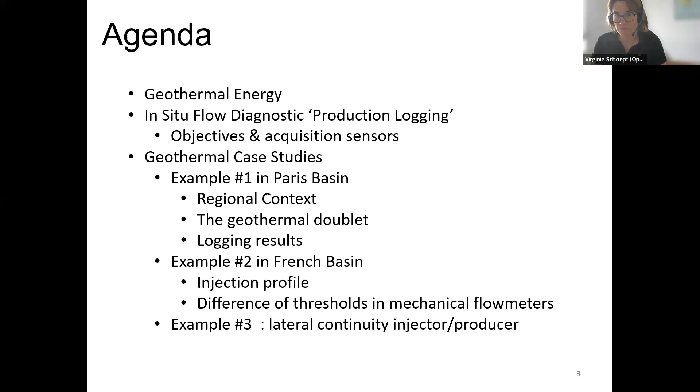So today we're going to start first putting in context this production logging, and I'd like also to present the instrument we are using before we deep dive into the case study. There are 3 different places and they are all in France. So let's put this case study in context. They are based on geothermal wells that are deep wells.

So there are different types of geothermal energy. There is the shallow one that is limited to 200 or 500 meters, depending on the local legislation. That's an illustration from EGEC, by the way, the European Geothermal Energy Council. And then below 500 meters, we go into deep geothermal. And I would say there are 2 types. One that goes to moderate depths, 5-6 kilometers, up to 200 degrees C.

That's a geothermal that is mostly used for heating and cooling, and we have examples from this type of geothermy. But there is also very deep geothermal. I think you had already different talks in this special interest group that go deeper.

So today, the tools we are going to use are tools that are used in hydrocarbon wells also, with the common spec of 150 degrees C max and 1034 bars. But of course, if we go to geothermal that is dedicated to producing electricity, when we go above 200 degrees C, we need to use other types of tools. They do exist, based on flask pressure housing. However, they don't necessarily last very long.

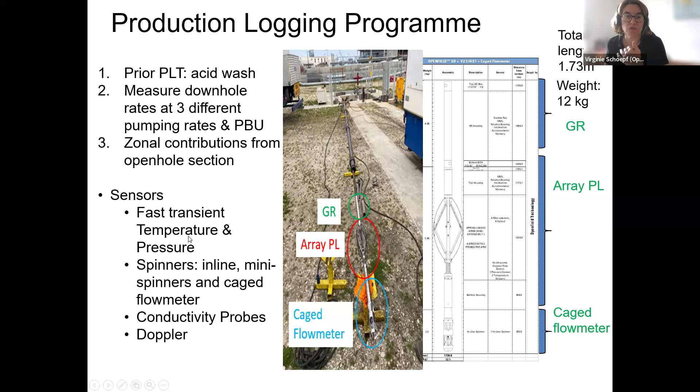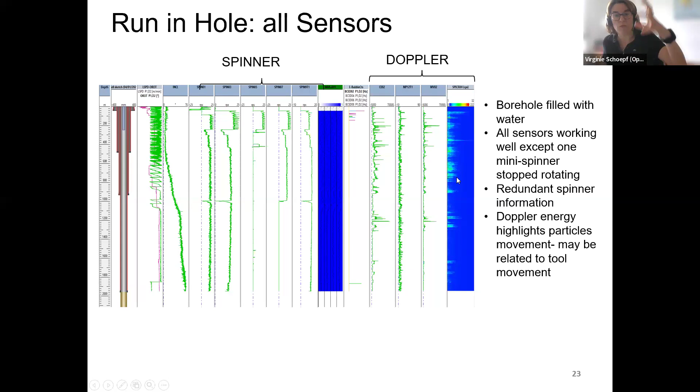Also looking at the run in hole, the conductivity data. So I mentioned that we have a conductivity probe. This probe is not calibrated to salinity compared to some of the ones, I think, that exist in the industry. For us, at OpenField, we were using this probe to really recognize water versus hydrocarbon. But in the low salinity range, we know that this probe is going to be

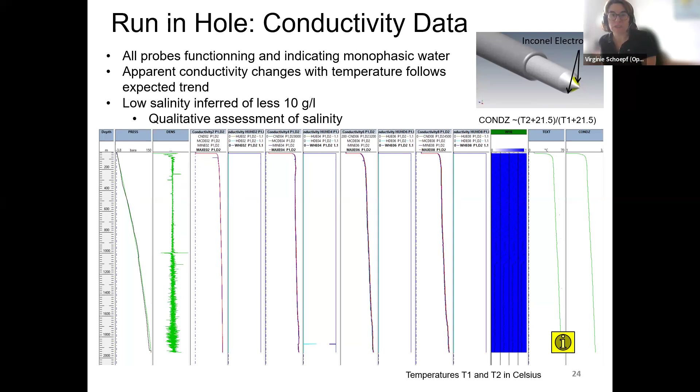What we know also from our sensor, the fact that we can still see an increase, that it is not saturated, we know that the salinity is less than 10 grams per liter. So of course, at surface, the water is produced and analyzed, and that was confirmed.

I mentioned that prior to going up and down, there are generally 3 steps of rates that are done. So that was acquired. So we acquire pressure, temperature, all the spinner data. And we compare with a surface metering that was given to us with quite a large inaccuracy, 25%. And based on the data we got from the production logging tool sensors, mostly propellers, this is inside casing, we are able to get more accurate than the surface metering. So it's more in a plus or minus 5%. So we are in good agreement with surface.

Another thing that they do at this stage, they shut in the well and they record the pressure buildup. Why do we do that? It's in order to understand the reservoir transmissivity, and that's quite key to characterize the subsurface environment.

Now, going into the reservoir in open hole, 8.5 inch, it was done in 2 different modes. First, it was done while producing. It's an artesian well. The Dogger is artesian, so it's producing naturally. And we collected some data during the production PLT, just by producing. Here you have again the well architecture and the open hole part, gamma ray, Doppler, water holdup, only water, no bubbles, and then the spinner data.

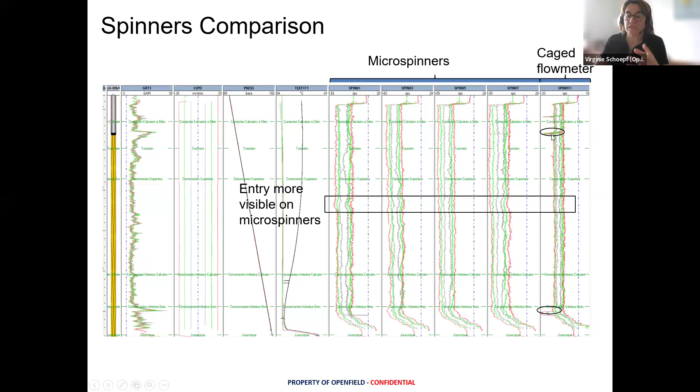That's quite important to have a sensitive flow meter, because it will be able to allocate that, to say that yes, there is some that is going into the limestone. We know that the biggest helix tends to average more; they are more inert than the small helix.

Now, if we look at the interpretation, zooming into the reservoir, as I say, we have limestone and sandstone. That's the lithology with the gamma ray. And then QZT is a flow profile while injecting. And as I was saying, most of the volumes, QZI is a zonal index, are going into the sandstone. But some of it, thanks to the small propellers, could be allocated into the limestone.

So when we look at that, we see, wow, it's quite, I don't know, 300, 400 meters, and maybe 50 meters of sandstone, and that's a vertical well, and we are drilling a lot, with most of the flow going to the sandstone. So that can maybe trigger some question: should we in the future do a deviated well with a longer stretch into the sandstone?

Well, yes and no. Again, the limestone, this is a profile just at the start. It may be better, may have more fluid going into the limestone, but there is also the fact that this well managed to get quite the objective in terms of rate.

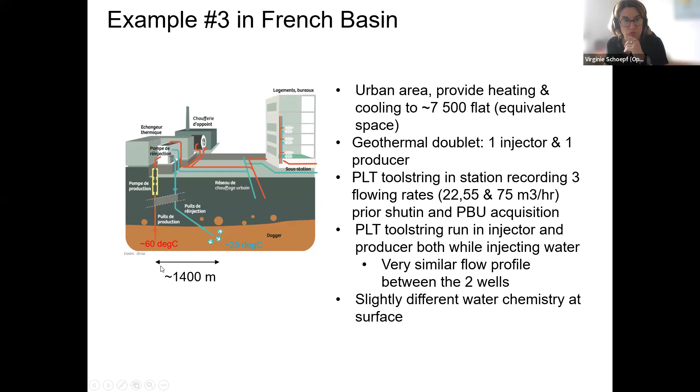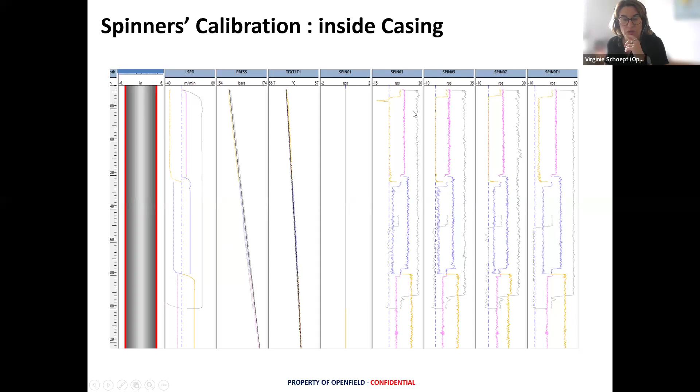And again, the temperature is quite low, close to 60 degrees. The distance between the two wells is over 1 kilometer. First, again, just to show you a bit of spinner calibration. I didn't mention that, but how do we do spinner calibration? We acquire data at different cable speeds. LSPD is cable speed. So you move the tool at different speeds, and then you record the rotation per second of the different spinners.

One way is to do a cross plot where you have the RPS, rotation per second, and cable speed, and then you will get a slope if you are in stable condition, and that slope is going to be the conversion of RPS into flow speed. So we can do that for all the spinners. The mini spinners tend to have the same standard slope. And then the inline spinner, remember there is a bigger helix, gives us also a speed.

So what's interesting here, if we look at the type of flow, the flow rate was 75 cubic meters per hour, and inside the casing it's 8.6 inch. What we could see, we had very accurate velocities, good calibration plots, and several micro spinners which repeat a velocity around 30 meters per minute, whereas the biggest helix at the center is reading higher.

So why is that? Well, if you use the flow rate and the ID of the pipe, you can see that you are actually in laminar flow. And in laminar flow, depending on where you are in the cross section, you will get different velocities. So the helix, the inline spinner, is at the center, reading higher velocities than the mini spinners that are just less than 1 inch from the wall.

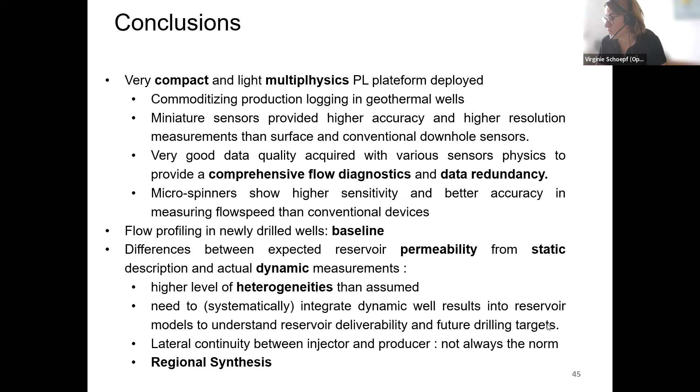And looking at the chat box, we have a couple of questions that I'm going to address. So Ivan Virshlo says, is it true that the Rhine Graben geothermal gradient is 100 degrees per kilometer? Basically 200 degrees at 2 kilometers depth. Do you have any insight on that? Yeah, it's 10 degrees per... I'm mixing up the units. It's 10 degrees per 100 meters. Yeah, it's 100 degrees per kilometer. Is that what the question was?

Okay. But there are some areas with even slightly higher gradients. Maybe there are people from Germany or from Alsace in the call, ES or Lithium de France, that know it's 100 degrees per kilometer, but even slightly higher sometimes. Yeah, we do see those, not just in Europe. Earlier we were talking about the projects in the United States, there are some areas where it's easy to find 100 degrees per kilometer.

Tuscany, Hawaii, there are lots: California, Oregon, Yellowstone, Indonesia. That's maybe something to think of for the future. We're going to have to design, as we talked about, tools that can handle super hot environments. That's something for the future.

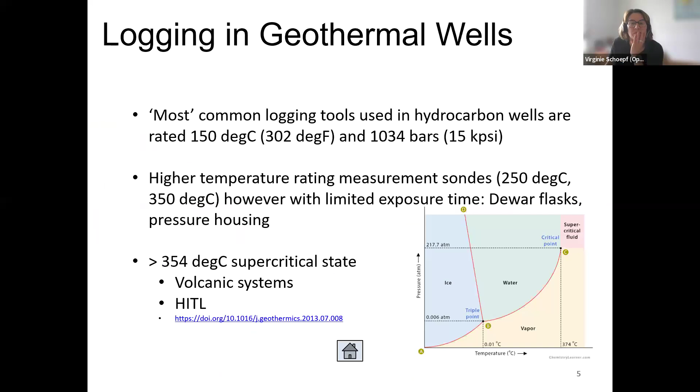Thank you for that. And then we have Mr. Thomas Franzen, who says, "Dear Virginie, merci for your comprehensive presentation. May I ask about the first three PLT static stages measured within the casing, while injecting or producing?"

Yeah, that's something discussed with people from CFG. All three of them are French examples. This is common practice. So generally, first you also do an acid wash, because in the Paris Basin you have limestone rocks, and it's a step they do with three types of flow rates in order to do a well test analysis. They are followed by a PBU, and then a reservoir engineer interprets the PBU as a response to the multi-rate test.

So it's to find any boundary that you would not have seen with seismic, because in the Paris Basin they're also using seismic data. You don't want a fault between the producer and the injector. I didn't do the well test interpretation on this case study, but if there are more detailed questions, I'm happy to ask the partners.

So he was asking, is it while injecting or producing? Sorry, I was assuming while injecting. Yeah, right, while injecting. It can also be while producing, but it depends on the well, actually. And connected to that, thanks for that question, I was also wondering: how do you designate the flow rates that you will test at? I suppose it's very well specific.

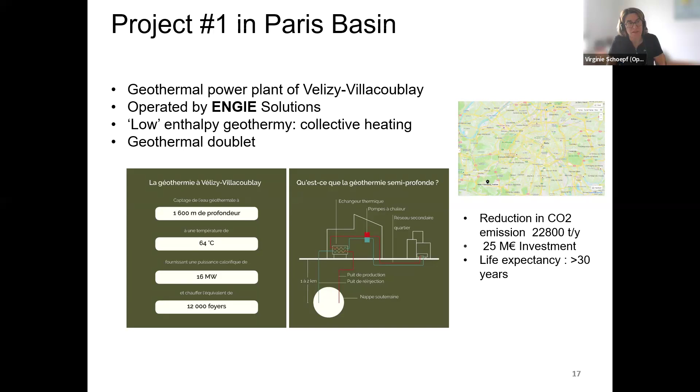Often the target, what I see in the Paris Basin on the technical data that is sent, is that the delivery rate is around 300, 400 cubic meters per hour in order to make this economical for a town of around 10,000 people, and it has to last 30 years. And then something you want to check with the transmissivity is that you are not going to have a decrease of, I think, 0.5 degrees C at the producer after 30 years, which would be the duration of the plant.

Mm-hmm. All right, thank you for that.

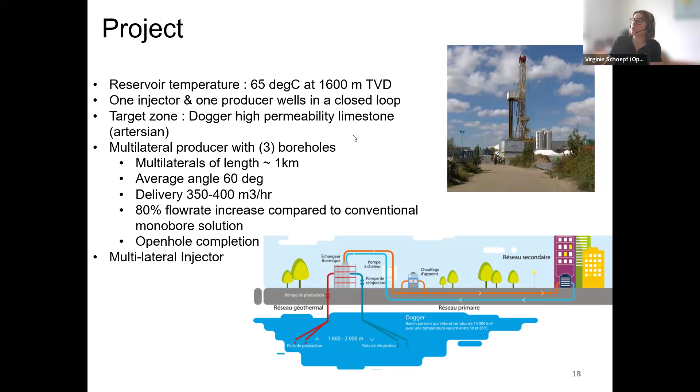There was a question that came from Carson Ball: can you repeat why the PLT measurement does not work so well in fractured reservoirs? No, and I wouldn't say that about the PLT. PLT is production logging, and in production logging the best you can do is have all types of sensors, because then you can analyze the data with anything you want.

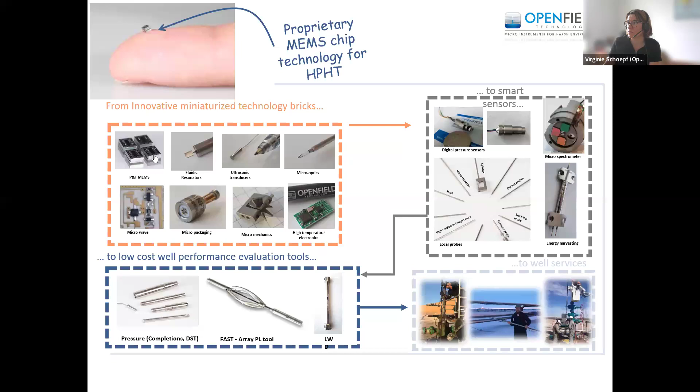I have heard sometimes people, especially in granite, when it is dominated by fractures, don't trust the spinners, even in open hole, because they say spinners sometimes get blocked. So they don't run spinners, and they just rely more on temperature. Most of the vendors have a tool string that contains not only temperature, but you can put a spinner, and they get quite close. So the problem with the propellers is they can be blocked if you have dirt in the well. Sometimes they don't rotate because the flow is too low.

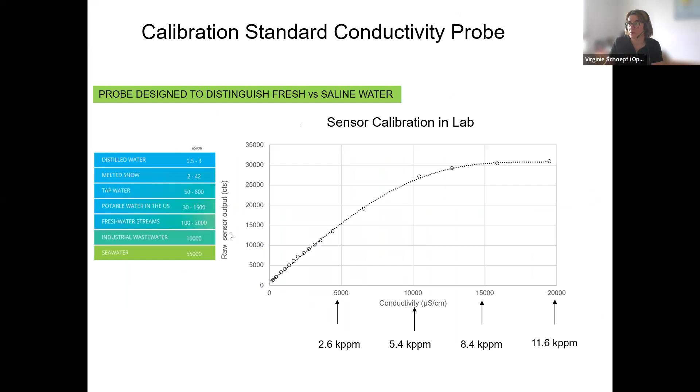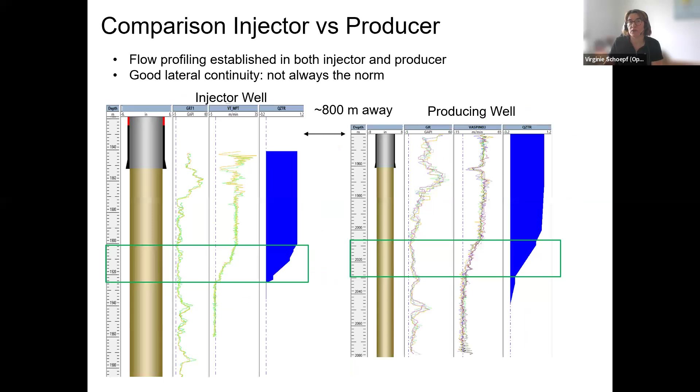So I wouldn't say spinners are bad. Let's say sometimes they don't rotate well, or you have to be careful if you are in a cased and perforated completion or gravel pack without proppant everywhere. You can have some flow behind the inner string, because the spinners, of course, are inside the casing or the inner string. They can only see where they are, whereas the temperature is sensitive to the heat, to the temperature of the rocks across the casing.

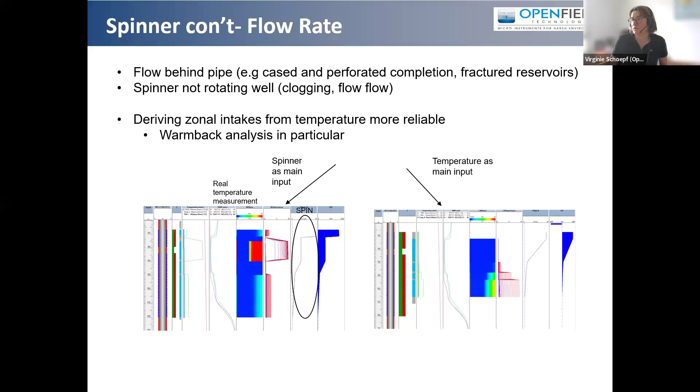So they are drilling and they are acquiring the log. And SDP has used an OpenField instrument. So it's really SDP that is on site. And then together with the likes of Engie, if they are a maître d'œuvre, or CFG, a company like that, or also Antea in France, they will execute or witness the logging program.

And the programs are, I would say, like for oil and gas, they are decided in advance. And there are people like oil and gas, and the same organization on shift, because they are drilling and logging 24 hours, 7 days a week. They are in urban areas, so they need to be careful with the noise, but there will be some noise, and they are working around the clock. And it's not because it's geothermal and you are in cities that people are not organized; they are very organized. So to answer your question, it's really on the logging part, SDP logging in these cases. But we work or help if they have questions on the sensor, but it's a teamwork.

Understood. Thank you. We do have a last question, a bit general, from Ravi. Sorry, a colleague reminds me that some OpenField people were on site at the start to introduce the new tool. So we can also go on site, but the main business is SDP logging. Okay. Thank you.

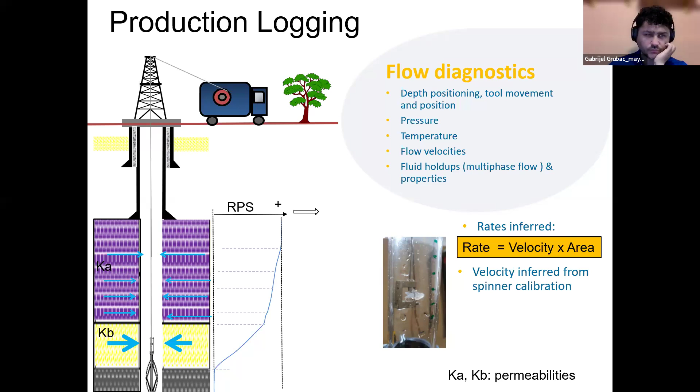So Ravi says he's got a general question. How do we get temperature versus depth data from an open source platform? It's a good question. Are you aware of any open source platform of temperature data for Europe? He's working on his research proposal. Well, there is a geo database in France, and also in the Netherlands, which has a good database, so I'd say it depends. For the French, there is the geo database from the BRGM. I can send the BRGM geo database link. Maybe I can email you, Gabriel, and you can forward it after.

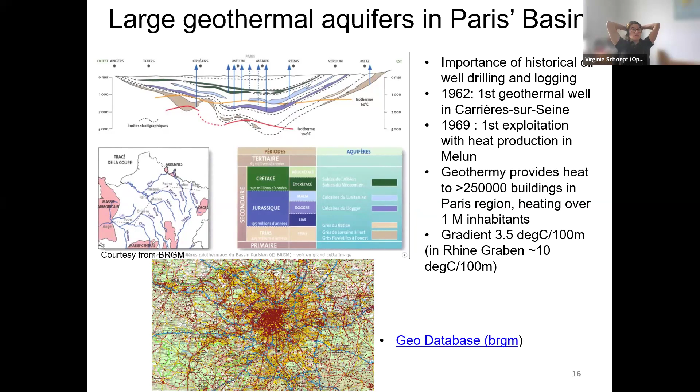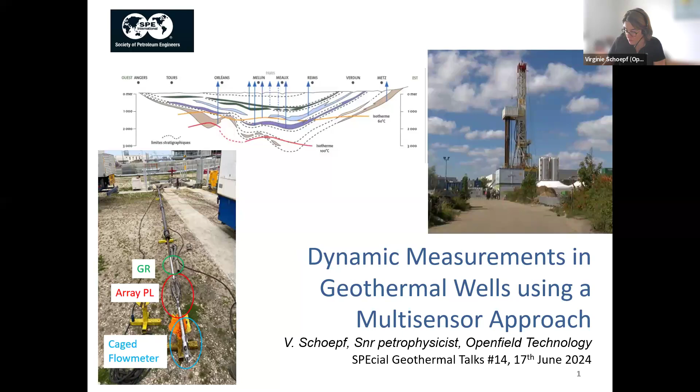A good question. So if you don't mind including that link, it would be great. I also posted one for the US. Stanford just created a thermal model. Mr. Franson sent us a link. Nice. That's great. Thank you very much. I'm going to save this link too.